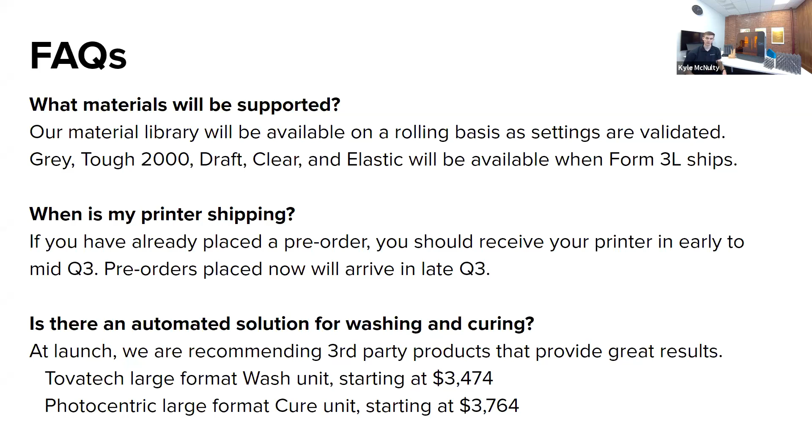So for everyone who's new to Formlabs, I just wanted to do a brief overview of our products and our company. We have two main technologies in 3D printing: selective laser sintering, or SLS, and our bread and butter that we founded and grew the business on, stereolithography, or SLA. We have our first SLS product called Fuse 1 coming out later this year. We've been working on that for several years, and we're really excited to get it out around the same time as Form 3L. It's going to be an exciting year all around.

Within SLA, since that's been our core business for 8 years, since 2011 when the company was founded, there are 3 printers within that.

There's the Form 3, which is our core desktop machine. It's a smaller build volume, about this big, sits on your desktop. That is the upgrade for the Form 2, which we were shipping for a number of years.

And then the Form 3L, which is the same exact technology. We'll talk about it throughout this presentation. You can essentially just think of it as a scaled up Form 3.

And then Form 3B, which is our equivalent to the Form 3, but for printing specifically with our dental, medical, and biocompatible resins. And finally, the last step in an SLA printing workflow is washing and curing.

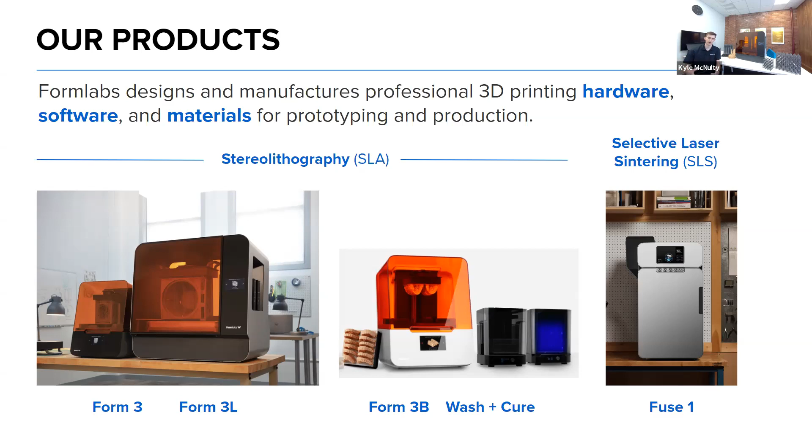We'll talk details on that a little bit more later. We have an automated washing unit, a piece of hardware that does that for you, and then an automated curing unit called the Form Wash and the Form Cure. So all those products together, in addition to our materials library, make up our SLA portfolio.

To touch on the specific form of SLA that Formlabs has, back in April of last year when we launched the Form 3 and the Form 3L, we introduced something called LFS, or Low Force Stereolithography, which is our unique take on stereolithography. It's a more advanced form that uses a flexible tank and linear illumination to produce incredible part quality, surface finish, smaller supports, and larger prints overall.

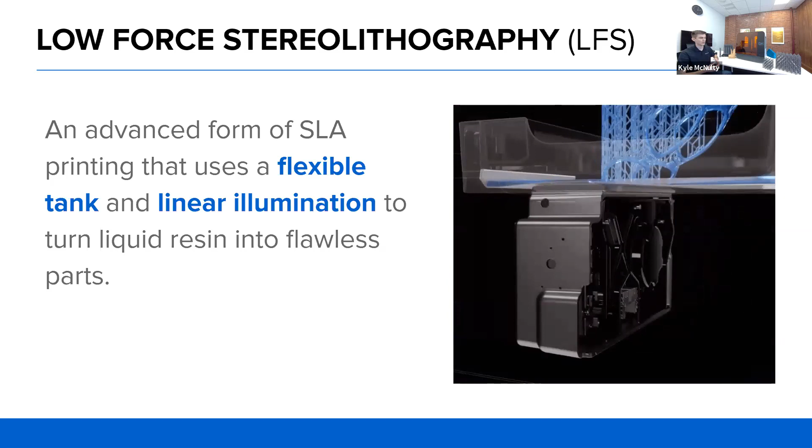That technology, which we'll touch on later, actually allows us to go to full Form 3L size parts, which is exciting.

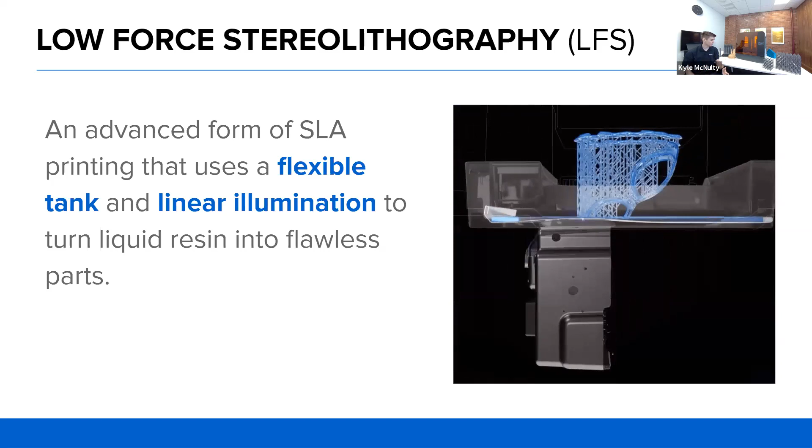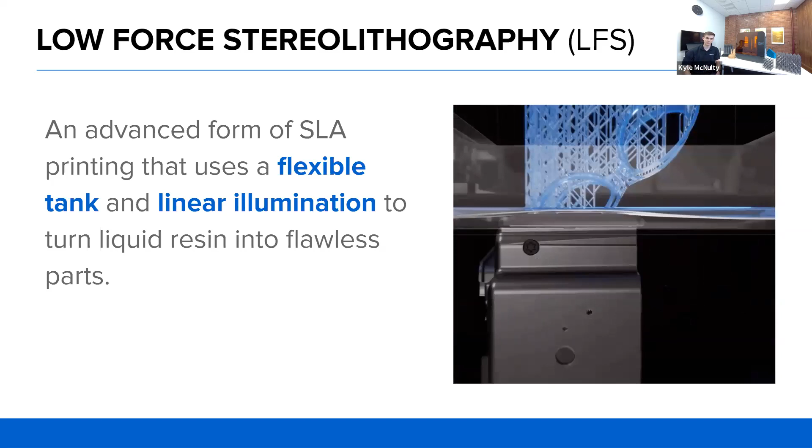So if you've used the Form 2 before and haven't had a chance to look inside a Form 3 or Form 3L yet, there's a virtual tour that Dan will link a little bit later in the presentation. The inside of the Form 3 and the Form 3L look totally different than a Form 2. That's the switch over to our new LFS technology.

The engine of the machine is just a whole different beast now, and the parts have gotten even better than they were before.

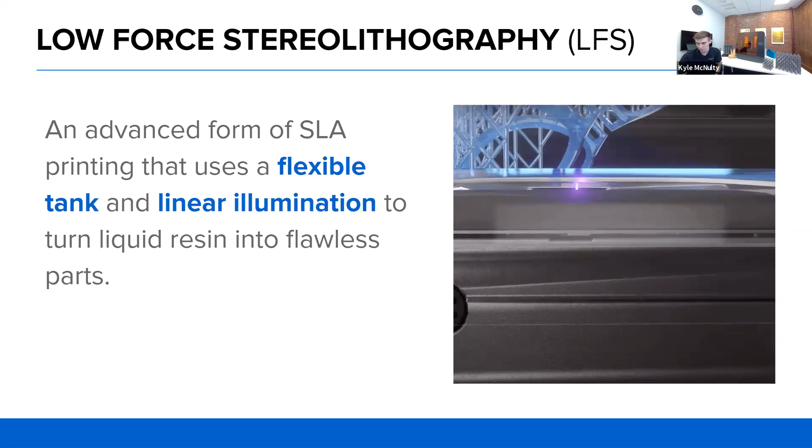So the typical LFS product workflow is: you'll start in whatever your CAD preference is—SolidWorks, Inventor, Onshape, whatever it is. You'll create your digital model and then typically export it as an STL, which is just the interchange file format that we use. Then you load that into our software for slicing and preparation called PreForm.

That's a free software that we offer that allows you to orient your parts to print, add supports—which is one of the things required in SLA for printing your part successfully—and then prepare the job and actually send it to the printer.

I'll go through this in the live demo, but it's a 3-step process where I insert a resin tank, a build platform, and cartridges, and then I press print, and you just let the machine run. It's that easy. Then we come back at the end, whenever the print finished, and remove the print from the printer.

And then there are a couple more steps to get to your final part. We would take that and wash it. For smaller parts, you can do it in the Form Wash. For the Form 3L, you'll do it in those third-party solutions that I mentioned a couple slides back.

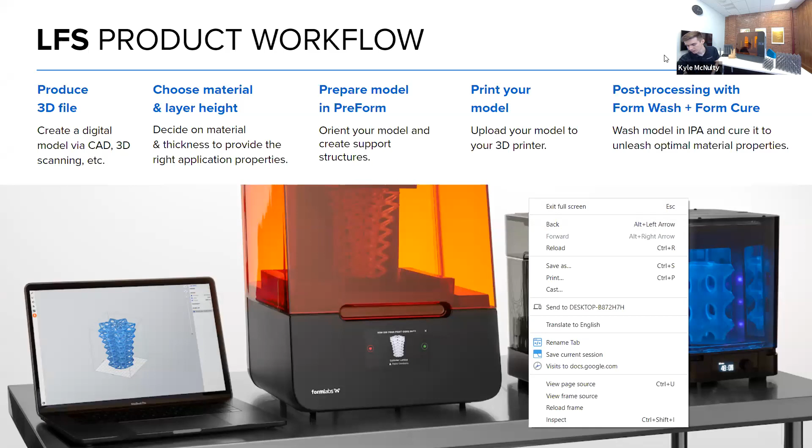I think everyone at Formlabs generally says this: it really is my favorite thing about SLA and Formlabs overall, our material library. One of the big benefits of SLA is you can do a really wide range of material properties and applications. We have over 20 at this point.

We have different categories: dental resins, jewelry and ceramic resins for casting, engineering resins, and standard resins that offer great surface finish and fine details for things like modeling characters. Within our engineering resins, you get all kinds of different behaviors. We have something called elastic that behaves similar to silicone, or rigid, which is glass filled and really stiff, good for printing thin walls.

Overall, the benefit of SLA is we have these interchangeable resin cartridges, and you can just swap one out for another. There's no purging necessary. It takes 2 seconds to swap from one to the other, and you get an entirely different material behavior. So a single printer with a multitude of applications.

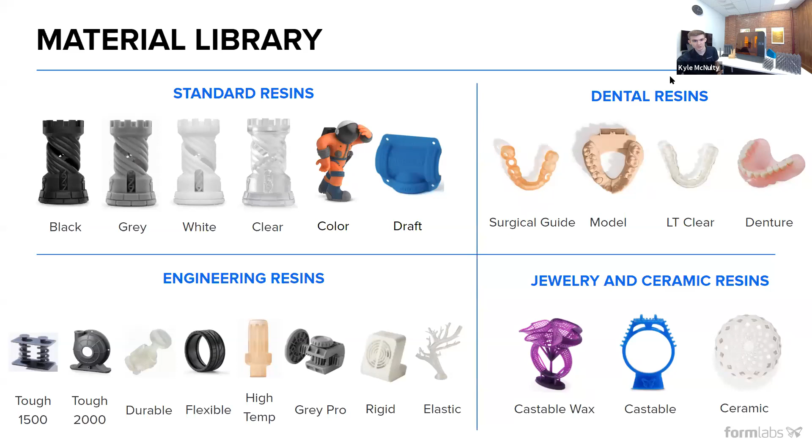That was a quick overview of Formlabs, specifically the SLA or LFS ecosystem. Diving into the Form 3L, which is our large format product within that portfolio, we'd like to talk about the 4 main core features of the printer. First and foremost, it's large build volume. As I mentioned before, it's 5 times the size of the Form 3 build volume.

Just to give you a sample of some of the parts that we've been printing here, beyond what's on the table, I'll place a couple on here and we can look at them in more detail later. During the live demo, I'll show better close-ups of those parts.

Second is the LFS technology, which is our more advanced form of SLA. What this allows us to do is print these parts. The overall benefit of LFS is it gets you significantly lower peel forces. When you're printing with an SLA, you're curing one layer at a time, and you're stacking many layers on top of each other, and that's what gets you your final printed part.

When you're curing each individual layer for several seconds, it's very, very fragile. And the more forces on that part, the more likely it is the layer is going to get damaged. If you stack several hundred or several thousand slightly damaged layers on top of each other, your end part might not have the greatest surface finish, or you may have lost some fine features.

So with LFS, we've been able to significantly reduce peel forces. There's really not all that much happening to the layer. The layer comes out perfectly, and you stack a bunch of perfect layers on top of each other, and you get a great looking part.

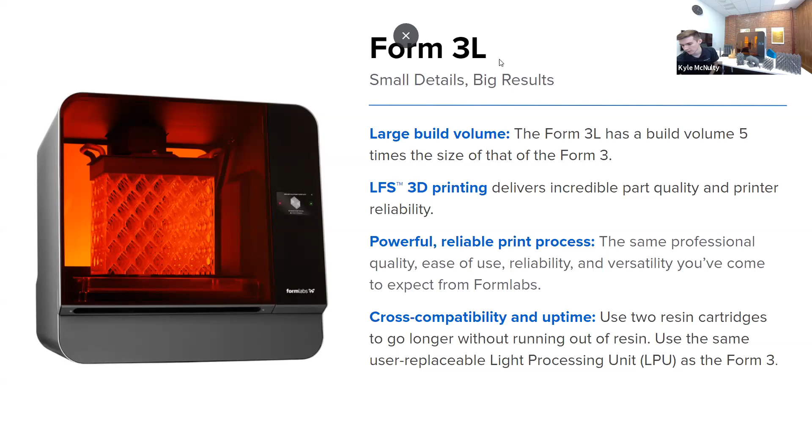So these are a couple of illustrations that I wanted to show because they allow us to get a little bit deeper into the printer in ways that we can't on the camera. They're pulled from a Form 3L virtual tour that we just published. So Dan, now or later, we'll post that in the chat. Definitely check that out if you haven't had a chance—we have an equivalent one for the Form 3.

If you haven't had a chance to see Form 3 or Form 3L in person at a trade show, especially in these times where it's hard to get to trade shows because they've all been canceled, it is a fantastic view into the inside and outside of the printer. Really recommend that walkthrough.

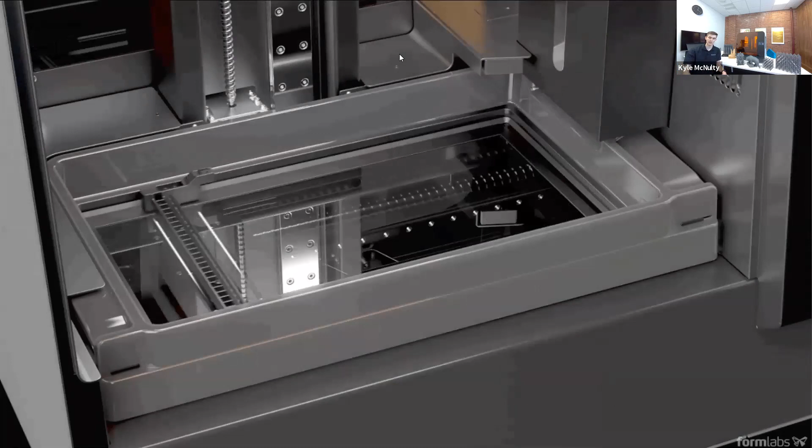So here, the clip we're seeing is the tank inside the printer, and we see the two LPUs moving underneath. Normally the tank is not clear, it's shown as clear here just for illustration purposes. That area moving underneath the tank is the two LPUs, and it scans back and forth. That's the linear illumination part of LFS.

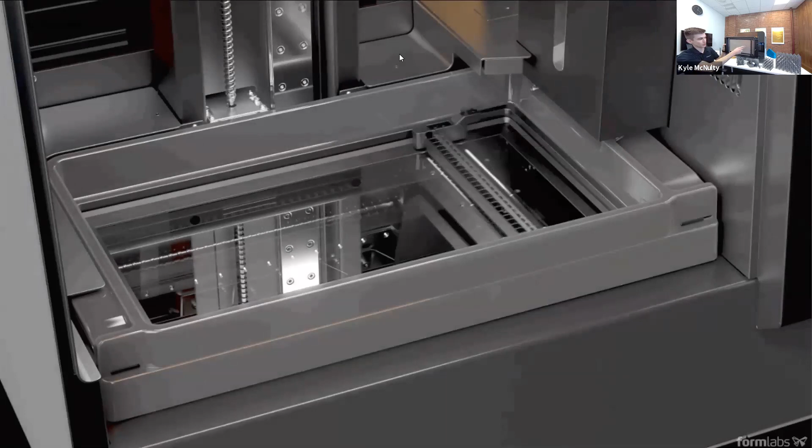To talk a bit more about that tank, it represents the other innovative part of LFS, which is a flexible film tank. This is part of how we've been able to reduce peel forces so significantly. Looking at this tank in the video, which might be a little hard to see, so I'll show it again in the live demo: the bottom of the tank is actually flexible. It's a two-layer film that is flexible versus the Form 2 tanks, which had a rigid bottom.

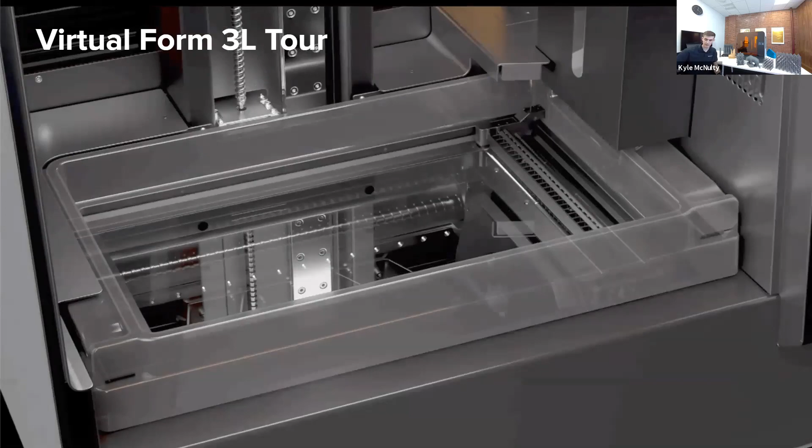Going into this second illustration, we see the overall printer opening the cover, and then it zooms into the tank — the part we saw on the previous slide. The tank cuts away to look directly at the two LPUs and a section on top called the rollers, which covers both LPUs. The rollers have a clear glass window in between them, and that's what the laser comes through. The laser then points into the resin and cures your part.

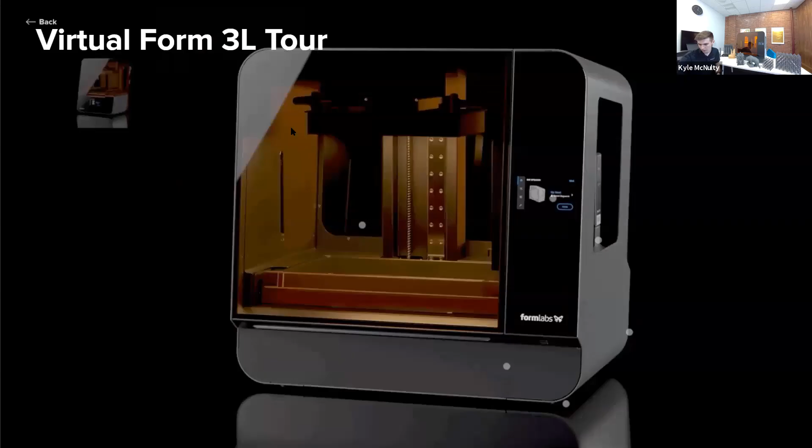So that's a quick look at the inside of the printer. Again, please check this out — this was probably a tenth of the overall virtual tour, so definitely check out the rest. You can look throughout the rest of the 3L at some of the specifics we won't have a chance to cover today.

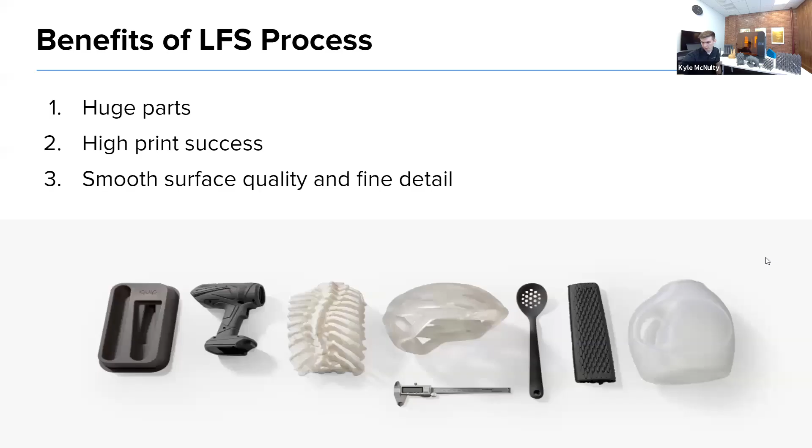Diving under the hood, and reiterating a bit of what I talked about before, the Form 3L technology is the exact same LPU as Form 3. The reason we always say 3L is just a scaled-up 3 is there are just two LPUs. The LPUs are staggered along the y-axis, so there's an overlap region in the middle of the build volume that both LPUs can point at — any point in that overlap region, both lasers can hit. Then there's a small region in the back and a small region in the front that only one laser can hit at a time.

Overall, what that means for print times is, depending on where you put the part in the build volume, there can be a print time advantage. If you print the same part on Form 3 and Form 3L, you can expect to see equivalent or faster print speed depending on where you place it. So if you took a dental arch and printed it on Form 3, then placed it in the overlap region on 3L, you'd see a print speed boost because the two lasers in that overlap region will share the load of printing that part.

Touching on hassle-free maintenance overall, our support team is incredible and able to operate fully remote. There's no service contract required for any of our printers, not even for 3L. Everything you can either replace yourself, just by talking directly to our service reps, and it lasts for several years with no issues. The LPU is fully replaceable if anything goes wrong after thousands of hours of printing.

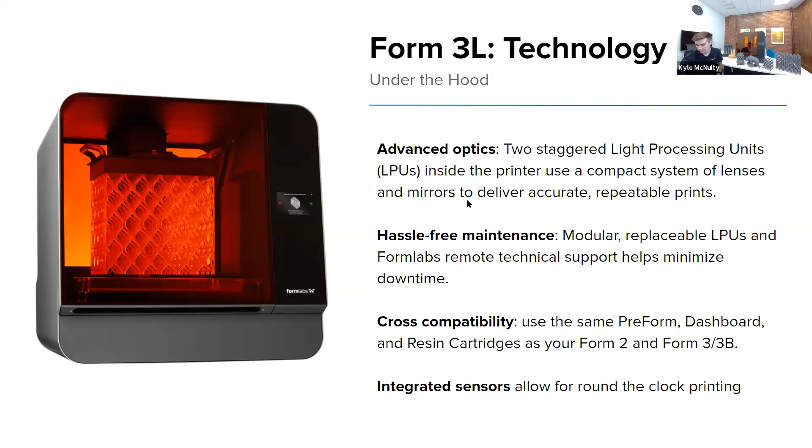The overall goal of this machine is for more production-oriented workflows, designed to print 24/7. The way we use them internally at the office right now is we just print nonstop — they really never take a break, and that's exactly what the machine is designed to do. Touching on some of the technical and product specs, the XY resolution is 25 microns.

So what that means is the laser is capable of moving in 25 micron steps. The laser spot itself is approximately circular, and it's 85 microns in size. So it's an 85 micron circle that's actually drawing out your parts, but it can move in increments of 25 microns.

The build volume, to switch it into inches, is 13 by 8 by about 11 or 12 inches, with width being the biggest dimension, height being the second biggest dimension, and depth being a little bit smaller. The laser power is 250 milliwatts, and there are two LPUs, so there's two lasers, and the price is $10,000. And like we said, there's also two resin cartridges that go in this cavity on the right side of the printer.

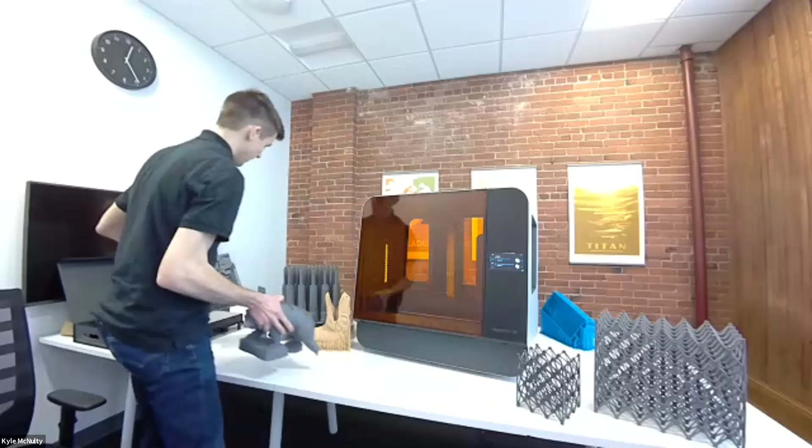Yep, cool. So I'll just move these parts out of the way. So what we have here is one of the latest prototype Form 3Ls that we have. Actually, this is one of the early production units. So over here I have a tank and a tank case, a little bit harder to see. So this is the case that would actually hold your tank when you need to store it, and then a build platform.

So we're going to walk through what you would typically do when you're starting a print on the 3L. As I said, I already prepared the model in PreForm, and I had pre-uploaded it to the machine, so it's already loaded onto here. So the first thing I'm going to do is open the cover. This cover is assisted by a gas spring, so it's really easy to open. Really feels great.

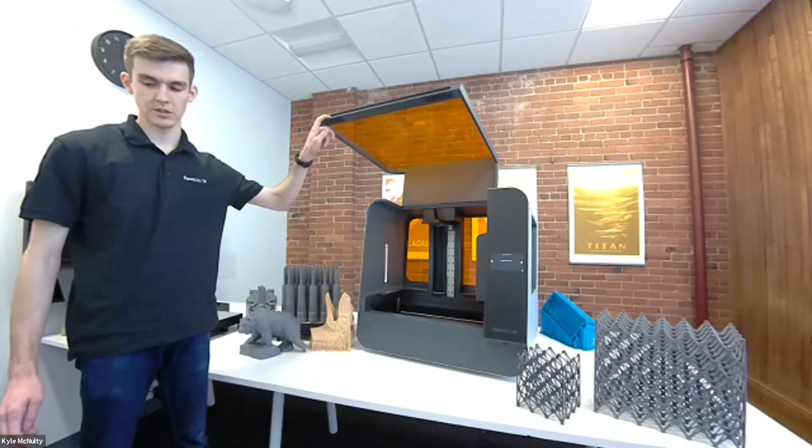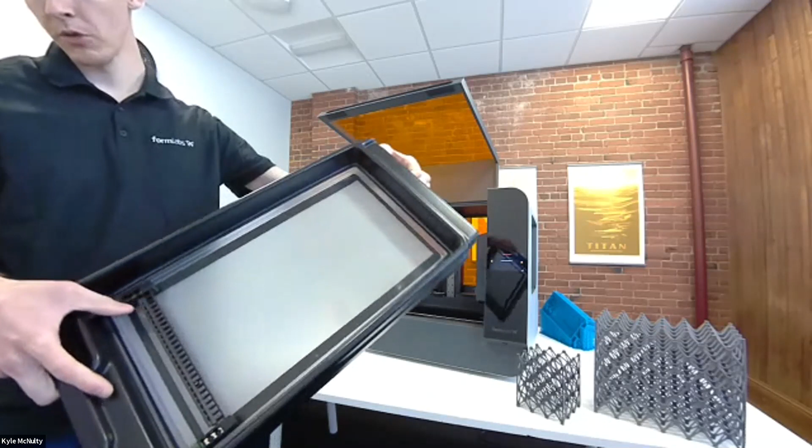I'm going to pick up the tank from both sides, and this is, if people didn't get a chance to see when the video was smaller before, this is the Form 3L resin tank. So very similar design overall to the Form 3 one. It has that flexible bottom film. It's just significantly larger. I'm going to go ahead and slide that into the Form 3L. Slides back right like that. That's inserting the tank. It's as easy as that.

I'm going to go for the build platform next. So the build platform, very similar design to Form 2 and Form 3. It's just, again, larger. It has these handles that make it really easy to lay flat on a table, which has been a helpful improvement. Slide that back to the printer. I'm going to close the build platform latch so it's secured there. So now the build platform and the tank are in here. We're all set with that. I can go ahead and close the cover.

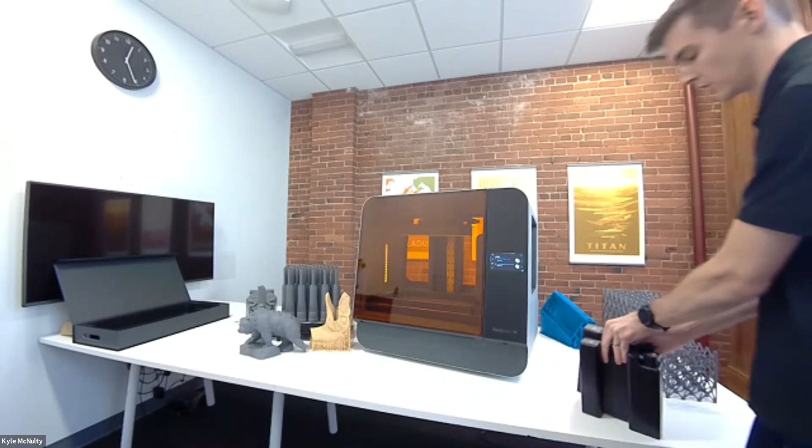And the last step is I'm going to grab 2 resin cartridges. So these are 2 gray resin cartridges that I've already unpackaged from how you would receive them if we ship them to you. There's a plastic cover underneath here that I had already taken off. So then I'm going to insert these right into the printer, the cavity over here where they sit. And these go right back into the printer and sit right like that.

So the workflow that we are going to recommend and ship, and you'll see in documentation, is if you need to do a really long print job, you can manually pre-fill the tank by just dumping a full liter of resin into it, and then have 2 full cartridges over on the right side. And that would allow you to print up to a 3-liter print. So if you needed to go away for a 3-day weekend and you wanted to let your 3-liter print, which to clarify is a really, really large print, let that go without pausing and asking for more resin, that would be the best way to do that.

What we've seen most often now is the best way to print, from a speed and material usage perspective, is to hollow out your parts. So all the parts that we've been printing so far tend to be between about a half liter and 3 liters. The printer can go up to a 20-liter part. It's just that we haven't found very many applications for it, but it absolutely can.

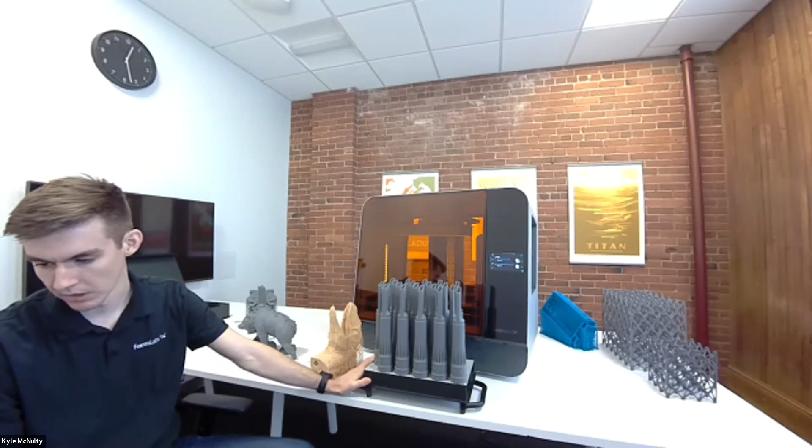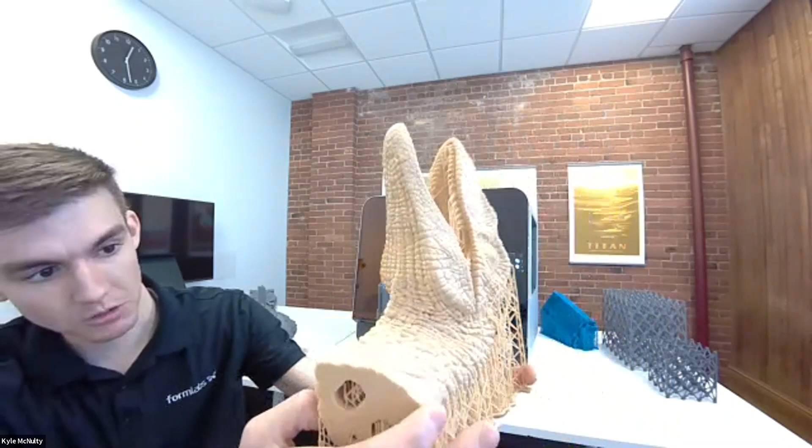So just to look at a couple of parts here, this is a full build platform of a vacuum nozzle part. I'll talk a little bit more about this later. This will actually be one of our sample parts that we're shipping with Form 3L. So you can fit 21 of them on here, which is really exciting. This is a part of a Velociraptor model printed in dental model, so I can show some of that detail that you get. So same exact detail you would expect from Form 3, just scaled up.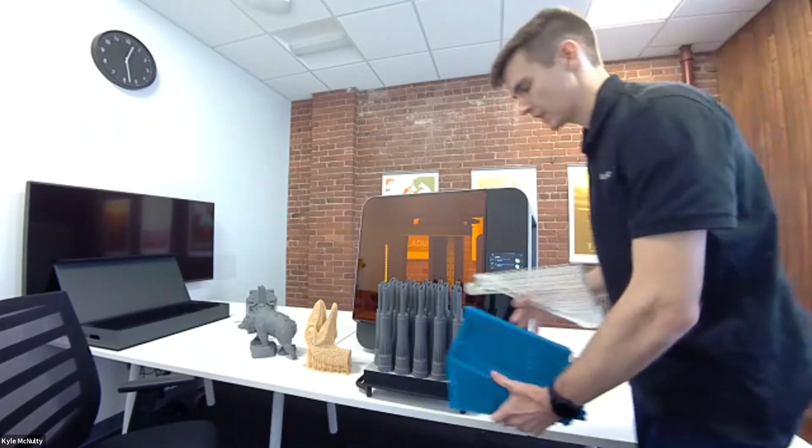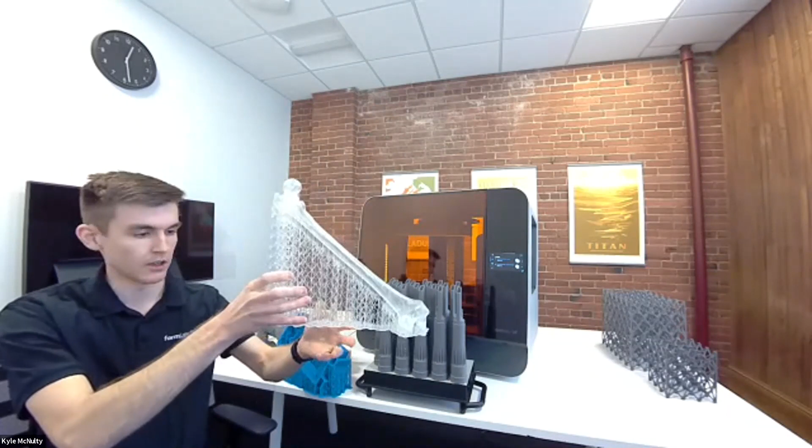Here we have a full-size femur, from about a 5'10" person. It would never be able to fit on Form 3, but can fit just right on Form 3L. You can fit 3 of these femurs at a time, so you can do one job with 3 of these femurs.

And then to look at a different material, that one was in clear. This is a draft print. Draft is our fastest printing resin, generally about 2 to 3 times the print speed as most of our other resins. So it's really great for rapid turn prototyping when you need to iterate through several versions of a design.

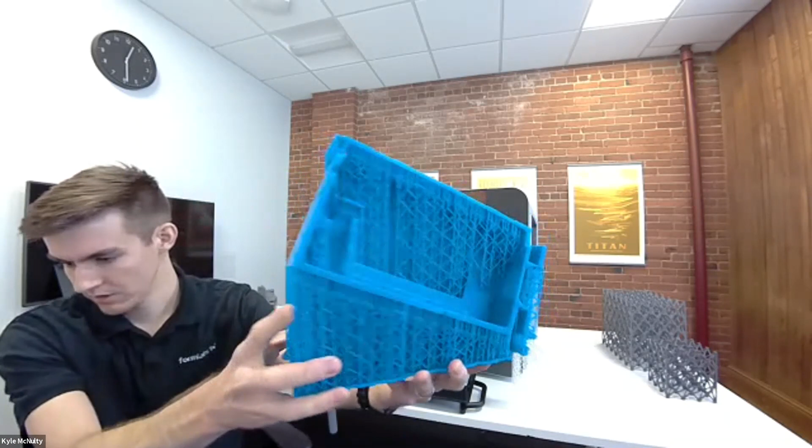And then if you need a presentation-ready prototype near the end, you can switch over to something like gray. This is the casing for the LPU that I mentioned before. Our engineering team was internally using the Form 3L to do exactly that—rapidly iterating through different versions of the LPU in draft, printing this large of a part in something like 20 hours. I don't know if it's quite easy to tell how large it is. They made a couple design tweaks and moved right on to the next version. And then the final presentation version that they used in the design review, they printed in gray.

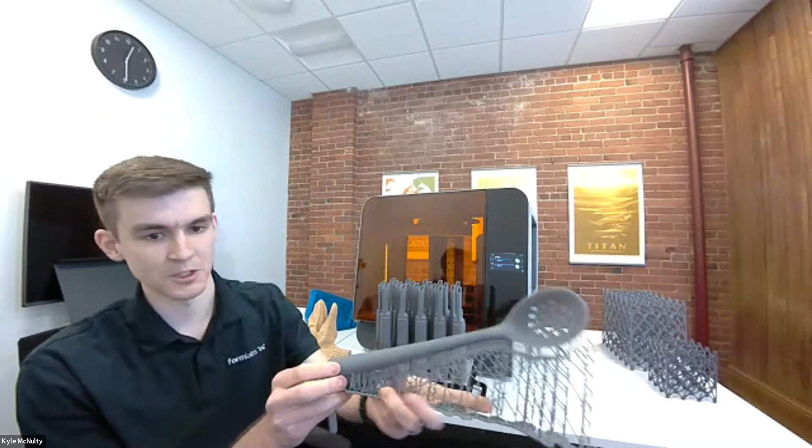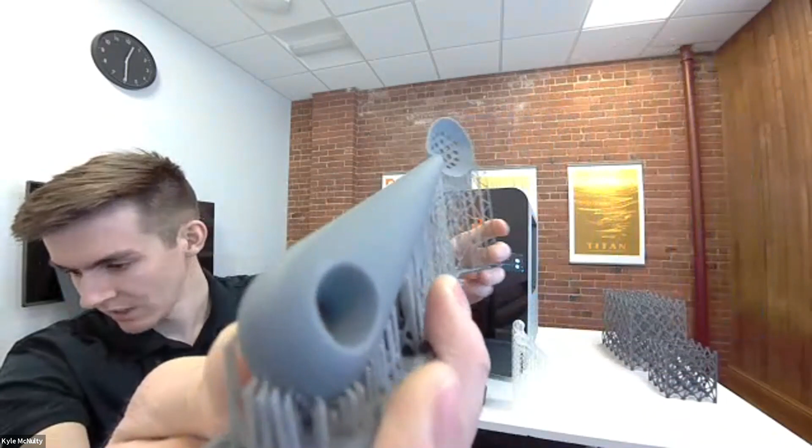To touch on some of the surface finish that I mentioned you get out of LFS, I'm still amazed about it, a year later. You just can't see layer lines anymore. That's been one of the things all of our customers are excited about with Form 3, and it translates right to the 3L. This is an OXO spoon that some people might have, available from Bed Bath & Beyond I think. There's not much of a layer line to see—just a perfectly smooth gray part.

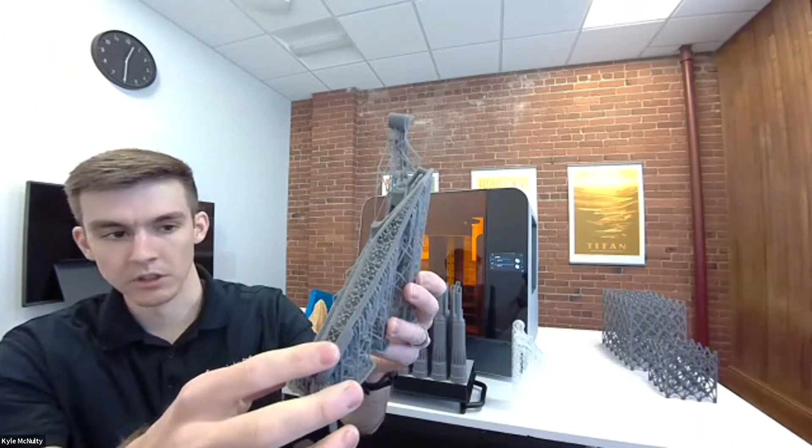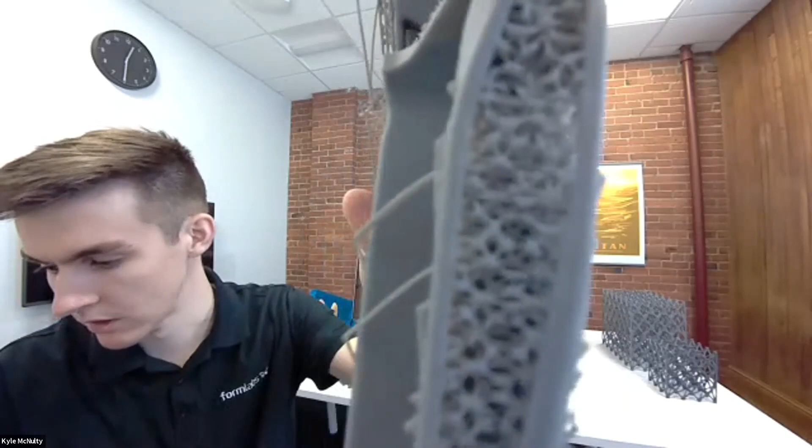And then the last one I'll show gets at fine features. Those are the two big benefits of LFS we talked about—really fine features and good surface finish. This is a part that has a really, really fine lattice inside of it. It's actually not support material; it's a fine lattice that the designer modeled in to show what you could do with an internal lattice structure. So this is not support material, it's just a really, really fine lattice built into that part. And then the parts that are supposed to be solid just have that smooth surface finish.

Okay, I'm going to switch back to the presentation now.

You're good. And are you seeing this? Yep, okay, great.

So that was the quick live demo of inserting all the accessories or consumables that you need to put into a 3L, and some of the parts that we're getting off it right now.

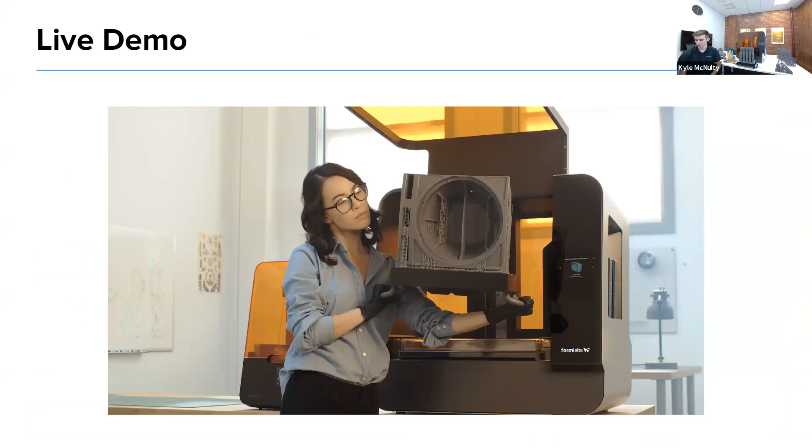Next thing I want to talk about is beta. The stage we're at overall with 3L right now is we're validating our final materials. We're starting to produce them at our factories, and we are doing a round of beta testing. We have 2 beta tests starting this week, and another 3 starting in a couple weeks. We've been beta testing actually since December, trying to learn as much as we can from our users.

So this was the first beta test we did, with a company called Optimus Ride based over in Boston. They're an MIT-founded startup that develops self-driving technologies for really efficient transportation. Their core product right now is a self-driving van, which is what you see pictured in this photo. The problem they had, and why we chose to do a beta with them, is they needed to print really large sensor enclosures for all the sensors they add to the vans to enable the self-driving capabilities.

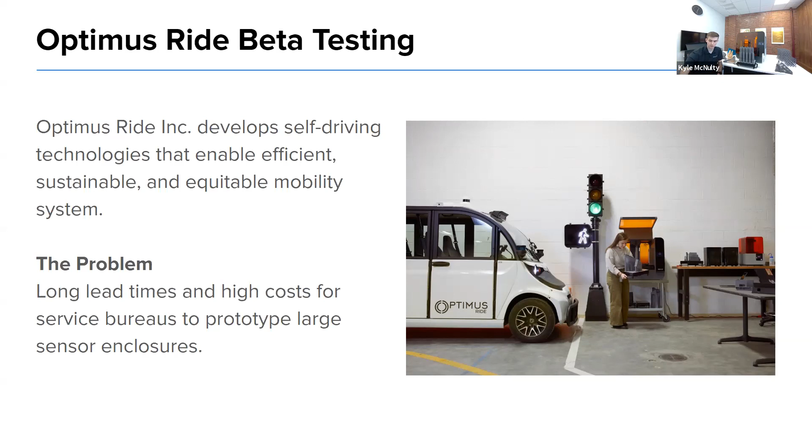They were using service bureaus, sending out those parts, and it was taking them a week or two to get them back, and it was really, really expensive—they would pay several hundred dollars for a part. That quick turn iteration is one of the main benefits of 3D printing, but they weren't able to do that with the service bureau because it would take two weeks to get a part back. That's why they were particularly interested in Form 3L for those large parts. Overall, they were incredibly pleased with the printer.

Here's a photo of Louise, the mechanical engineer, pictured here, showing one of the parts they got back from the service bureau. That's the black part she's holding, and the same part printed on 3L. Previously she was using the service bureau, and then for the period of time they had the 3L, they were able to switch over to that.

The big thing she emphasized when we talked to her after the fact is that previously it was either ship it out to a service bureau, or if it was more time sensitive, she would painstakingly do what a lot of us do now for large parts, which is split it into several pieces, print it on a Form 2 in usually 6 or 7 pieces with little tabs all across it, then take it out, post-process it, and glue all the pieces together to get your big overall part. It's really a painful process. It works, but it's much easier to just print it as one. So for a lot of the massive enclosures she needed to do, she was able to do it in 1 or 2 pieces, which was just a great shift.

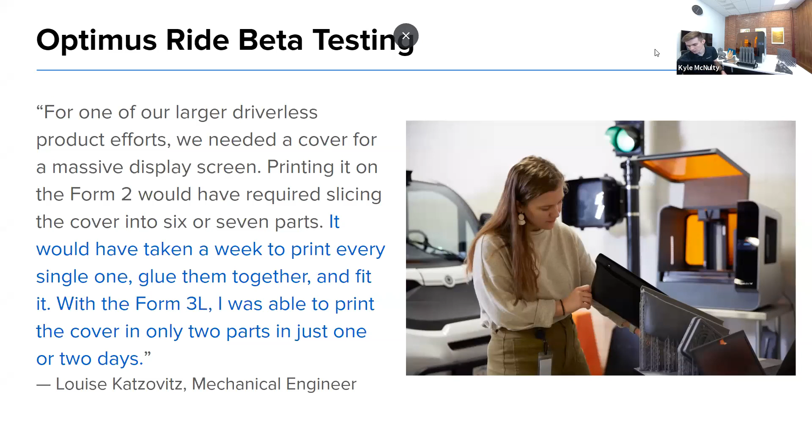Second, Louise and the Optimus Ride team were really pleased with the surface finish of the 3L parts versus their Form 2, which they were already generally happy with. What they appreciated about the 3L parts is they didn't have to do any sanding. They were using these as relatively cosmetic parts, so their ideal use case was to put them right on the car and send the car out into the world. They didn't want to do a bunch of sanding and painting, so they were able to do that directly with the 3L parts. There weren't layer lines that are the dead giveaway that this was a 3D printed part - it was smooth enough to be used as a cosmetic cover.

Okay, so that is a check into the beta test we did back in December, and we'll definitely look to talk about all the ones we're doing now in a couple months when we start shipping the printer. We'll be excited to talk about all those users.

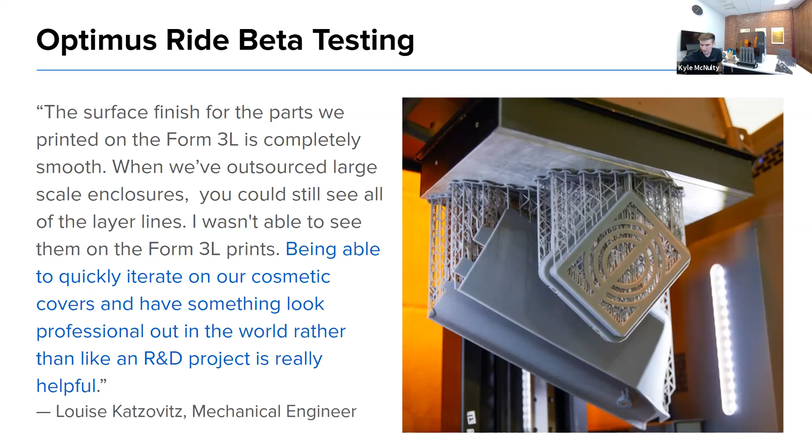So lastly, before we hop into Q&A, I wanted to preview a sample part. The first sample part we'll be shipping with 3L, and we'll have several others, is a part called the vacuum nozzle, pictured here. It's printed at 100 micron layers in gray resin, or gray V4 resin. It's 96 hours per job, so this entire print job of 20 nozzles takes 96 hours.

That equates to about 5 hours per nozzle, which really is a print time that could enable low or even medium volume production, if you need to make several hundred of these for a project early on before you can switch to a larger volume production solution. As for resin usage, each individual nozzle is 63 milliliters of material, which works out to $9.45 of material per nozzle.

Overall, we're excited about this workflow. We've been able to print a lot of them at once, so it's really been a great trial run of short run batch production internally here, where we're producing hundreds of these nozzles a week with just 1 or 2 printers.

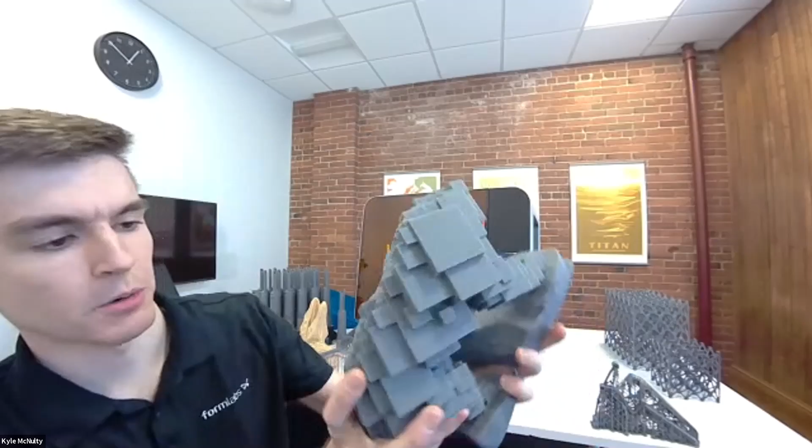Another good question: a large sample part I saw at the user summit had some significant stitching on it where the two LPUs meet. An engineer mentioned they're working to improve the blending through software—has that improved over time? Yes, it's gotten significantly better than the one you saw. Let's find an example. So this is the stitching area here—can you make this full screen? Great, thank you. The way this part was laid out, the LPUs met right about in the middle of the spine of this model. There's a very, very small faint line, but in general it's not really noticeable anymore. So overall it's improved significantly since then, and we're still continuing to tune calibration—it'll get even better.

Christian asked a more general Formlabs question, which I'm happy to take real quick: how do you remove the support structure? For most Form 3, Form 2 prints, if it's a big, robust part without a lot of detail, most of the time you can just grab all the supports, tear them off, and do a little light sanding. If you have a super high detail part, you'll probably want to go in more individually and snip with flush cutters or whatever other tool you have, to make sure you're not tearing details off the part as you remove the supports.

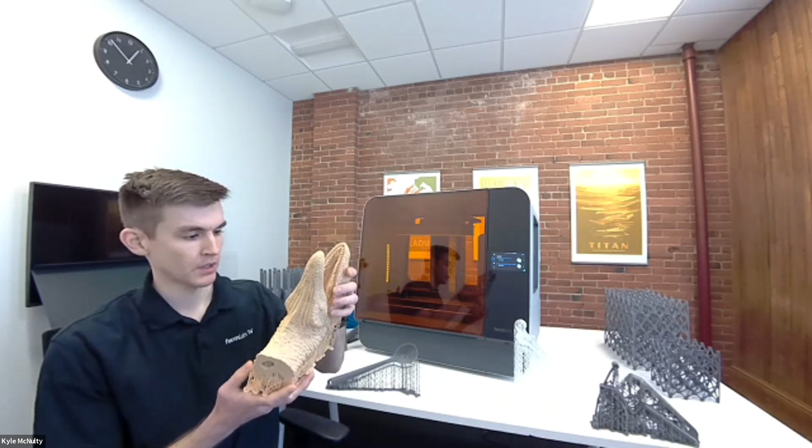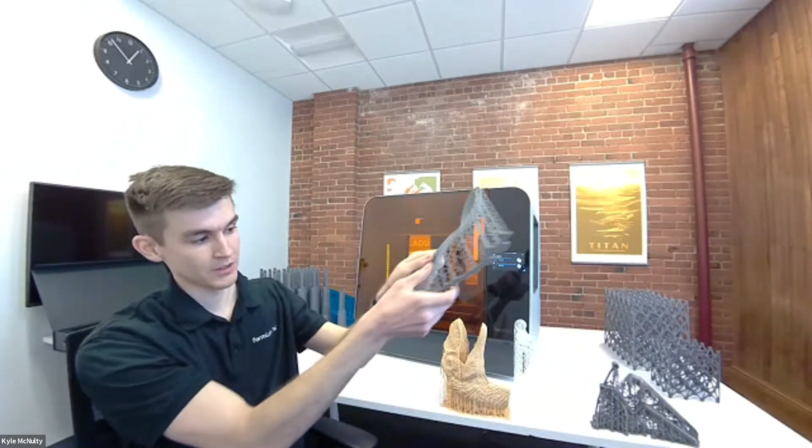I don't know if you notice anything special about the 3L support removal. We are continually trying to make them as small and not dense as possible, that's ongoing work. These teeth are a great example - you probably go in and individually snip supports off the bottom to make sure you're not doing any damage. But all these supports on the bottom here, this is a robust enough section that I would just pop these right off, like this spoon - the supports come off in one piece and then you have your spoon. Pretty good light touch demo right there.

Jonathan has a comment - we had a great response from your support folks on our Form 3. Thank you, you're very welcome, Jonathan. I'll be sure to let them know those guys work really hard and really do care about making sure people keep printing, so that's really good to know.

How long did the big Dymaxion take? The big Dymaxion printed in gray, as it is here, takes about 60 hours. In draft, it takes about 18 - that's the improvement you get from draft, about 3 times faster.

Great question - what exactly are the internal sensors monitoring to keep the printer running 24/7? So what is the printer checking on itself? One issue that sometimes cropped up on Form 2 was consumable detection errors that would get in the middle of your 20-hour print - a tank might no longer be detected and the printer would pop up confused because it no longer saw a tank. We improved that significantly in Form 3, and there's even more improved sensors in Form 3L.

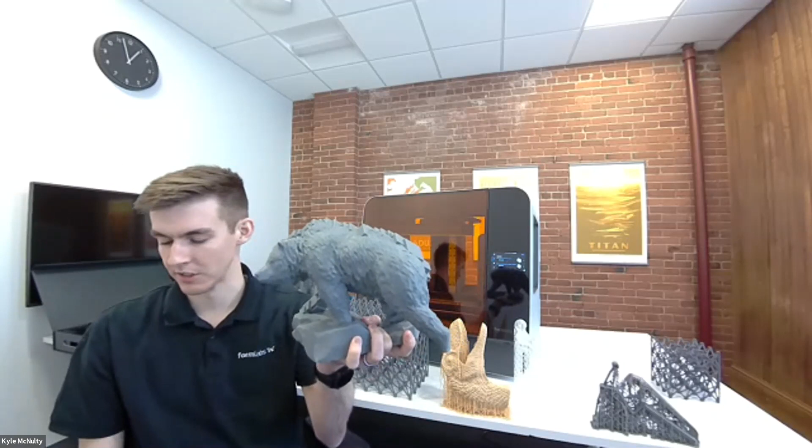Like I said before, the workflow we recommend to everyone for the 3L is whenever possible, hollow out your parts because it'll print faster and you'll use less material.

Tyler asks, do you have freedom to move around supports in PreForm like you do with the Form 3? Yeah Tyler, it's the exact same software with the same support editing tools, so whatever you do in the Form 3 should transfer pretty quickly over to the 3L.

Robert asks, is there a way to hollow out solid objects to save resin? Yes, absolutely, Robert. Typically that's done in software that's not in our suite—things like Meshmixer or whatever other modeling software you use. You'll want to set wall thicknesses and things like that. One thing to keep in mind with a Formlabs printer, or any SLA, is you want to add a drain hole, because otherwise you can create a vacuum inside the part and it can blow out during the print from the buildup of negative pressure.

I think the Raptor head there has one. Yeah, the Raptor has a couple.